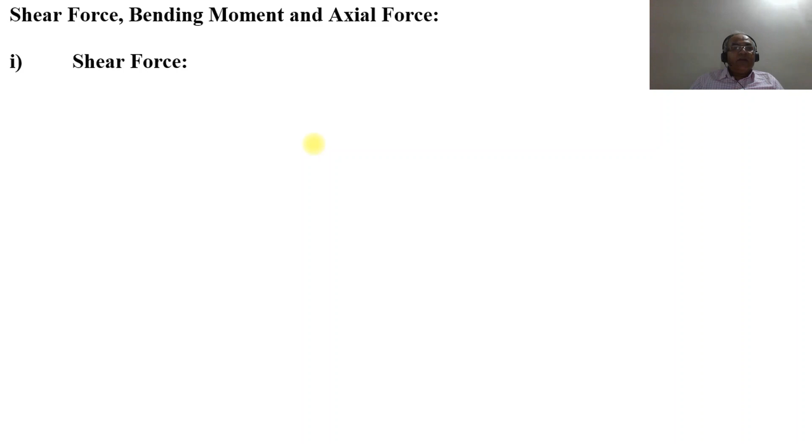Now, we're going to take up the shear force, bending moment, and axial force. First, we're going to take up the shear force. The shear force SF at any section of a beam is equal to the algebraic sum of the vertical forces, that is, forces perpendicular to the axis of the beam, to the right or left of the section. So that means the algebraic sum of vertical forces, that is, the load which is coming on the beam, is the shear force.

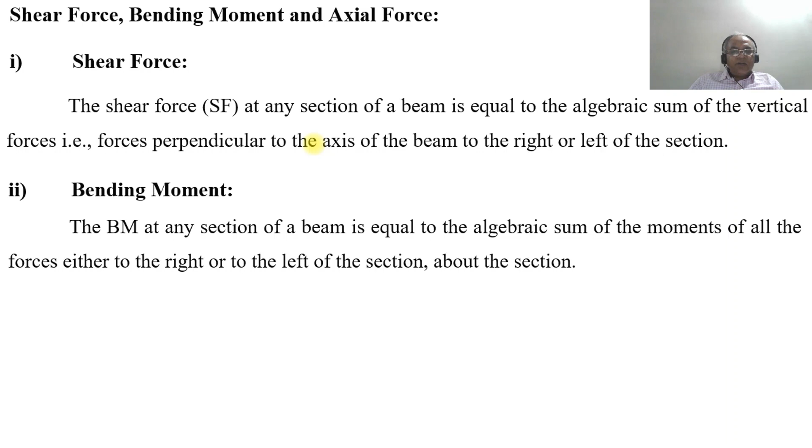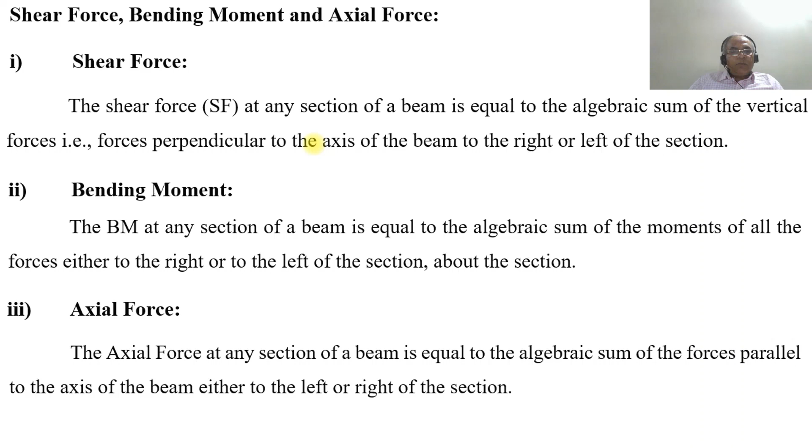What is bending moment? The bending moment at any section of a beam is equal to the algebraic sum of the moments of all the forces either to the left or the right of the section about the section. Then the axial force. The axial force at any section of a beam is equal to the algebraic sum of the forces parallel to the axis of the beam, either to the left or the right of the section. So in the shear force, that is the vertical force, in the bending moment, the algebraic sum of moments, and in the axial force, the horizontal force which is coming on the beam.

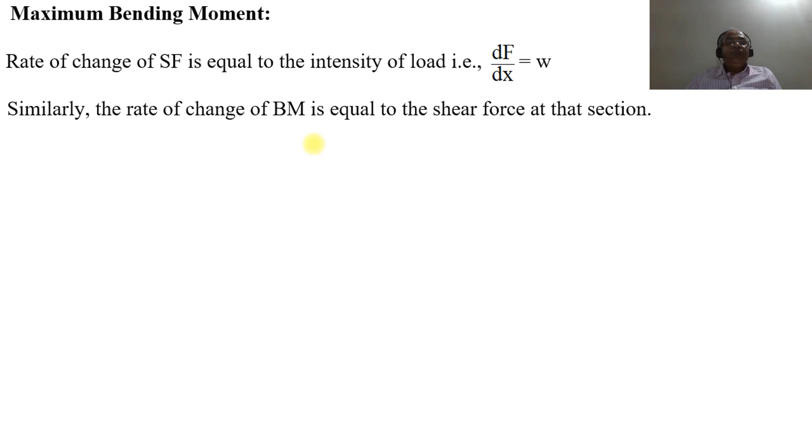Next, we are going to take up the maximum bending moment. The rate of change of shear force is equal to the intensity of load, that is dF/dx will be equal to W. Similarly, the rate of change of bending moment is equal to the shear force at that section. That is, for maximum bending moment, dM/dx should be equal to 0. That is, BM is maximum when shear force is equal to 0.

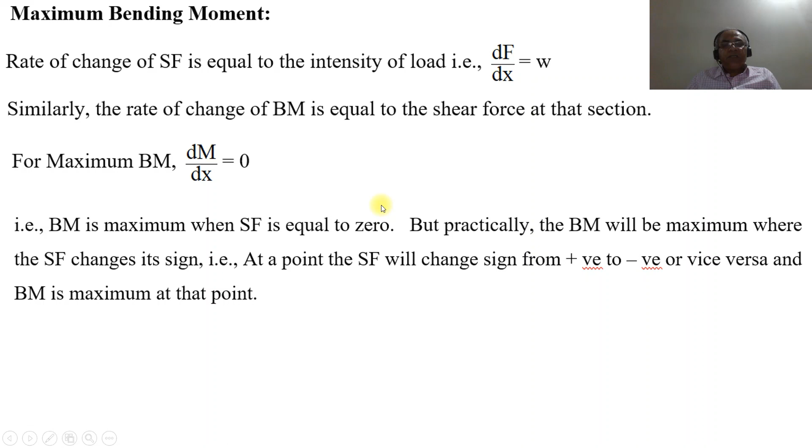But practically, the bending moment will be maximum where the shear force changes its sign, that is, at a point where SF changes sign from positive to negative or vice versa, and bending moment is maximum at that particular point. These things are going to be discussed in detail when we take up the problems.

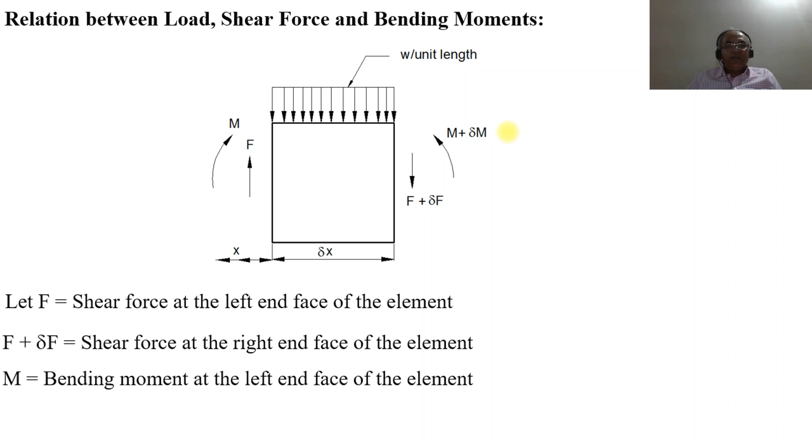Let capital F be the shear force at the left-hand face of the element, and F plus delta F the shear force at the right-hand face. Then capital M is the bending moment at the left-hand face of the element, and M plus delta M is the bending moment at the right-hand face. W is the mean rate of loading or mean load intensity over the length delta X, and W into delta X is the total load on the elemental length delta X. For equilibrium, sigma F and sigma M will be equal to 0, that is, the algebraic sum of forces and algebraic sum of moments will be equal to 0.

So first we are going to take up the shear force. For the equilibrium of the elemental length, sigma F will be equal to 0. Calculating from the left end, the load acting upwards from the left end is considered positive. Therefore, F minus W into delta X, because the load is acting from the top downward, minus of F plus delta F, the load acting downward at the right end, is equal to 0, because the algebraic sum of all the forces should be equal to 0.

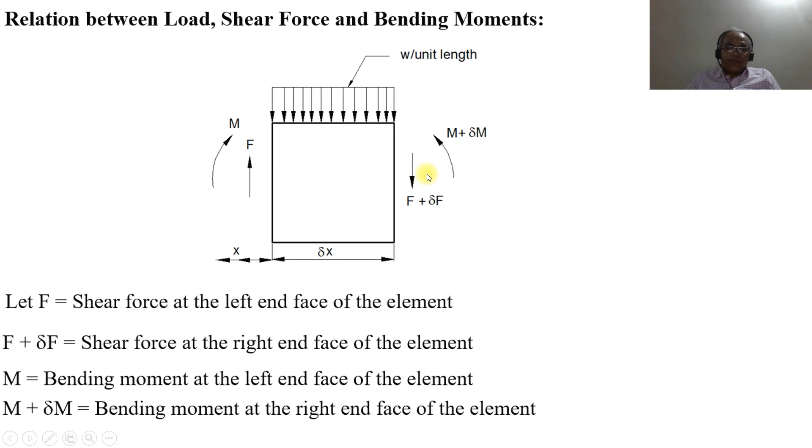So here F is acting in the upward direction, calculating from the left, which is positive, F minus W into delta X, acting from the top downward, and also the force acting downward, minus of F plus delta F. That is the calculation from the left towards the right, and so you get this.

When you expand this, minus W into delta X minus delta F will be equal to 0, because when you open the bracket, plus F and minus F cancel, and transferring delta F to the right side, minus W into delta X will be equal to delta F. Therefore, delta F by delta X will be equal to minus W. As delta X tends to 0, dF/dx will be equal to minus w, where small w is the mean rate of loading or mean load intensity over the length delta x, and w into delta x is the total load on the elemental length delta x.

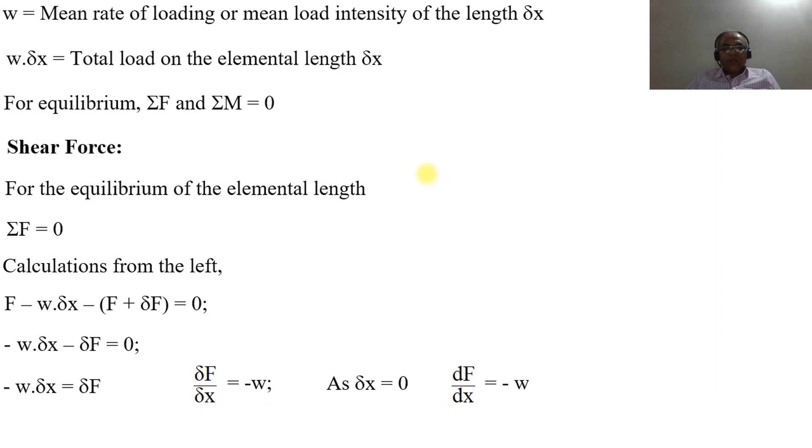For equilibrium, sigma F and sigma M will be equal to 0. Now we are going to consider the shear force. So for the equilibrium of the elemental length, sigma F will be equal to 0. So again we have the same equation: minus w into delta x minus delta F will be equal to 0. So delta F by delta x will be equal to minus w. As delta x tends to 0, dF by dx will be equal to minus w.

So thus the rate of change of shear force at any point on the axis of the beam is equal to the intensity of the distributed load at that same point. Based on the direction of loading, the intensity of the load, W, will be either positive or negative. If there is no distributed load on a segment of the beam, then W will be equal to 0.

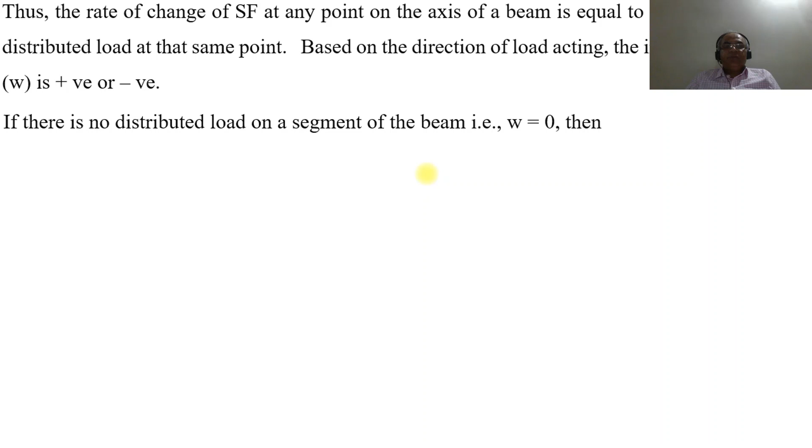Then dF by dx will be equal to 0. So SF is constant; if dF by dx is equal to a constant, the SF varies linearly in that segment of the beam. This will be discussed in detail with examples when we take up the problems. So next we are going to take up the bending moment.

For the equilibrium of the elemental length, sigma M will be equal to 0. That is, the algebraic sum of the moments will be equal to 0. Calculating from the left end, the clockwise moment, M plus F into delta x minus w into delta x by 2, minus the counterclockwise moment, M plus delta M, will be equal to 0.

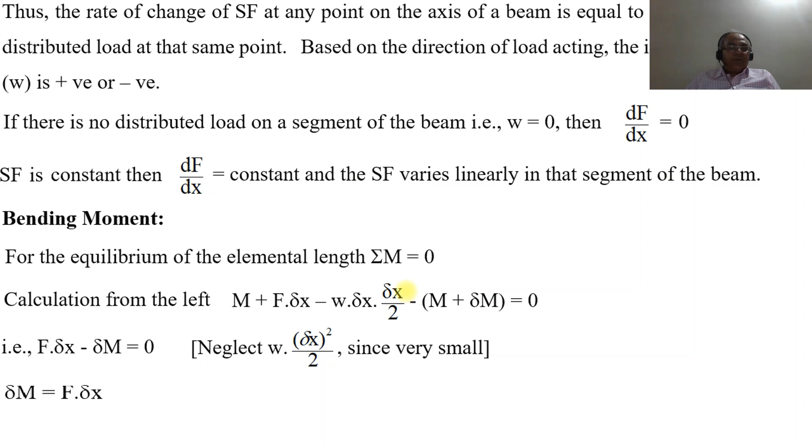So once you consider that here, it will be F into delta x minus delta M equal to 0. As delta x itself is small, delta x squared by 2 is further small, so that will be neglected. So delta M will be equal to F into delta x. Therefore delta M by delta x will be equal to capital F. As delta x tends to 0, dM by dx will be equal to F.

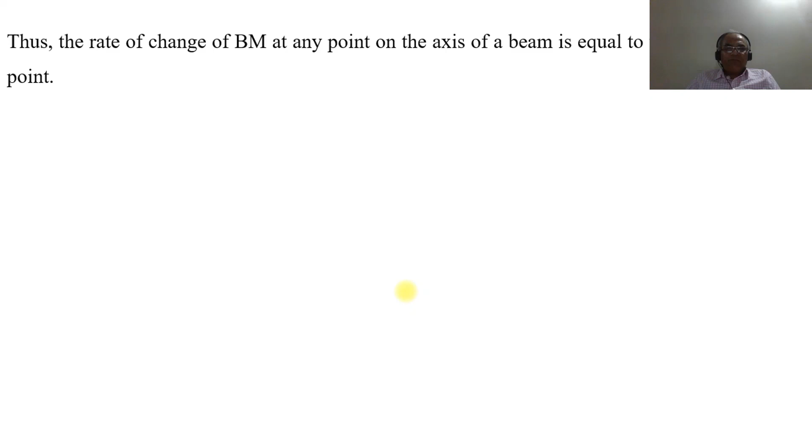So thus the rate of change of bending moment at any point on the axis of the beam is equal to the shear force at that same point. So the maximum value of bending moment is obtained when dM by dx is equal to 0. This is also the condition for the minimum value. Therefore, it has a maximum value when the SF is 0 or changes its sign. That means when the shear force changes its sign at a particular point, we will have the maximum bending moment.

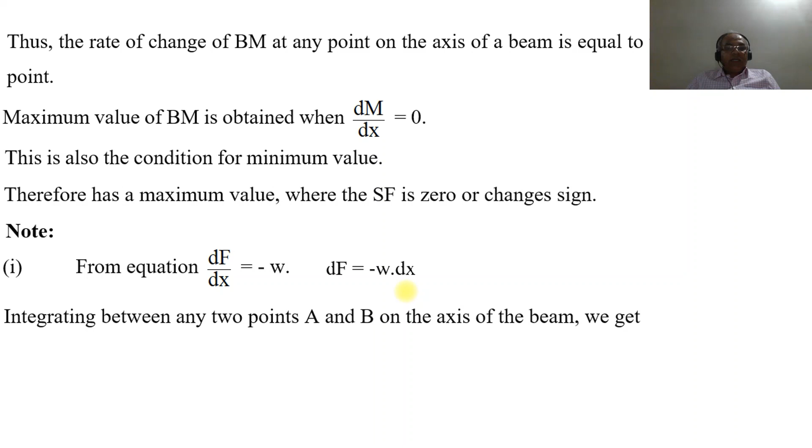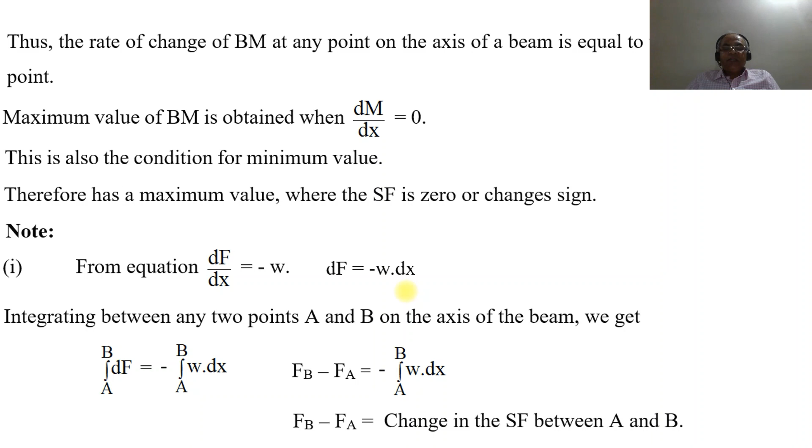From the equation, dF by dx will be equal to minus W. So dF will be equal to minus W into dx. Integrating between the limits of the 2 points A and B, the integral of dF from A to B will be equal to minus the integral from A to B of w dx. So FB minus FA will be equal to minus the integral from A to B of w dx. FB minus FA is the change in the shear force between A and B. The integral from A to B of w dx is the area below the load diagram between A and B.

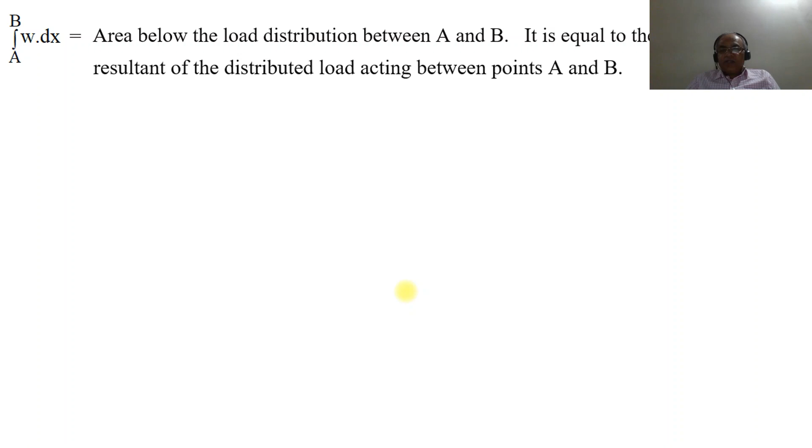It is equal to the magnitude of the resultant of the distributed load acting between the points A and B. So thus the change in shear force between 2 points along the axis of the beam is equal to the total load downward between those 2 points. Then from the equation dM by dx is equal to F, dM will be equal to F into dx.

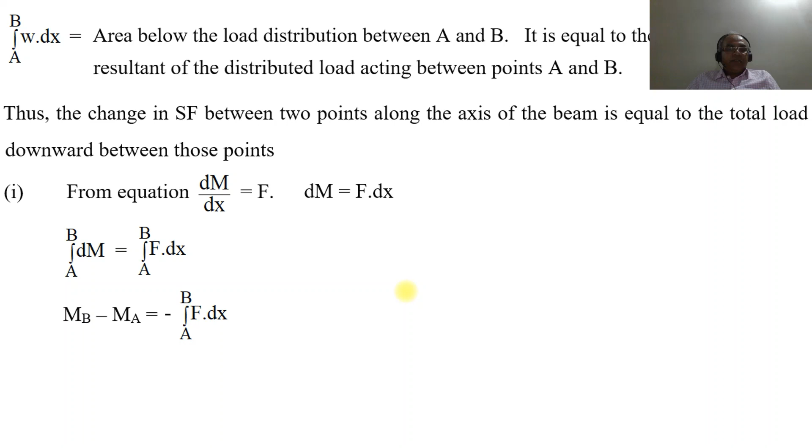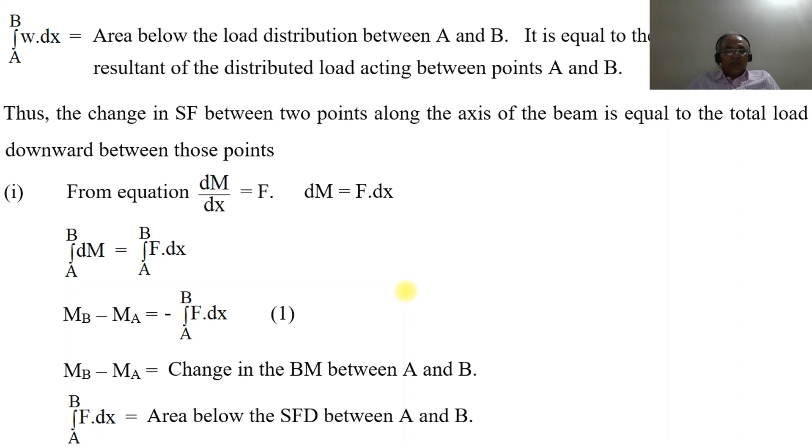Taking the integral on both sides, the integral of dM between the limits A to B will be equal to the integral from A to B of F dx. MB minus MA will be equal to the integral from A to B of F dx. Call this equation 1. MB minus MA is the change in the bending moment between A and B. The integral from A to B of F dx is the area below the shear force diagram between A and B. Equation 1 is valid even when a concentrated load acts on the beam between the 2 points A and B.

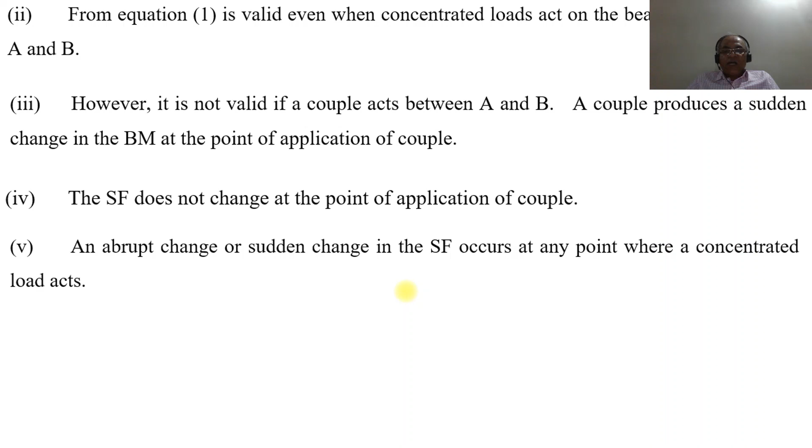Number 3, however, it is not valid if a couple acts between A and B. A couple produces a sudden change in the bending moment at the point of application of the couple. Number 4, the shear force does not change at the point of application of a couple. And number 5, an abrupt or sudden change in the shear force occurs at any point where a concentrated load acts. So this is how you will be able to discuss the different types of forces on the beam: the shear force, the bending moment, and the axial force. Thank you.